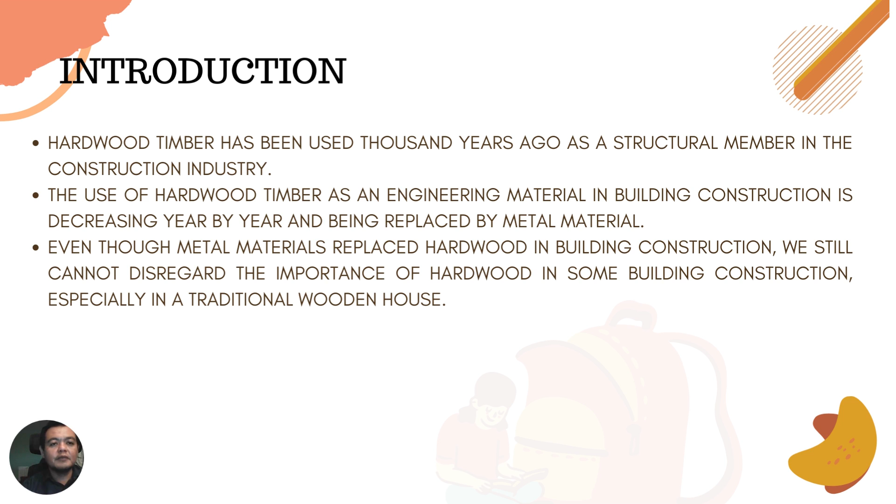For the introduction of this research, as we know, hardwood timber has been used thousands of years ago as a structural member in the construction industry. The use of hardwood timber as an engineering material in building construction is decreasing year by year and being replaced by metal material. Even though metal material replaces hardwood in building construction, we still cannot disregard the importance of hardwood in some building construction, especially in a traditional wooden house.

One of the hardwood timbers that is very popular in Sarawak is Eusideroxylon zwageri, known as Belian hardwood in Malaysia, Ulin in Indonesia, and Borneo ironwood in English. As reported by Soerianegara and Lemmens 1993 and the United States Department of Agriculture 2010, this evergreen tree species is distributed in eastern and southern Sumatra, Bangka, Belitung, Borneo, the Sulu Archipelago and Palawan.

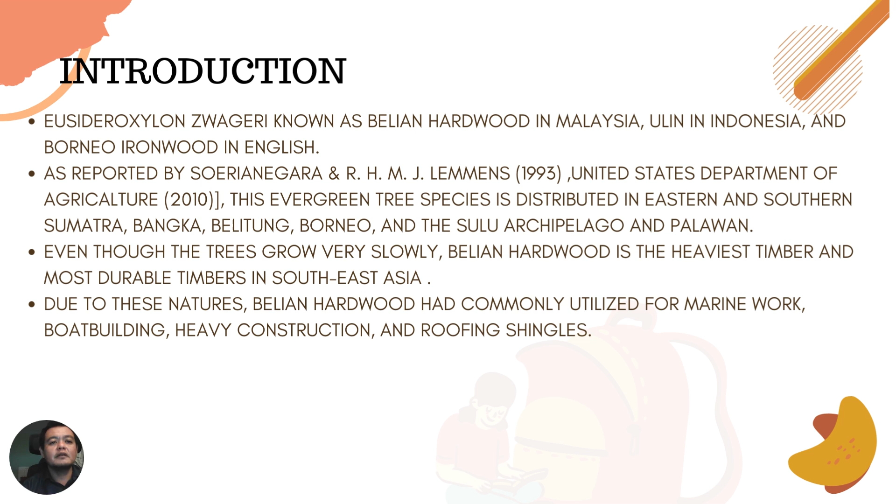Even though this tree grows very slowly, Belian hardwood is the heaviest and most durable timber in Southeast Asia. Due to this nature, Belian hardwood is commonly utilized for marine work, boat building, heavy construction, and roof shingles.

Borneo Talk 2020 states that the people of Sarawak and Sabah use Belian hardwood for building and structures as well as for art pieces like masks or effigies, like the Kenyalang hornbill bird in Sarawak, which is symbolic of the Iban God. These pictures show one example of using Belian hardwood to build the belawing Pereka Tawai,

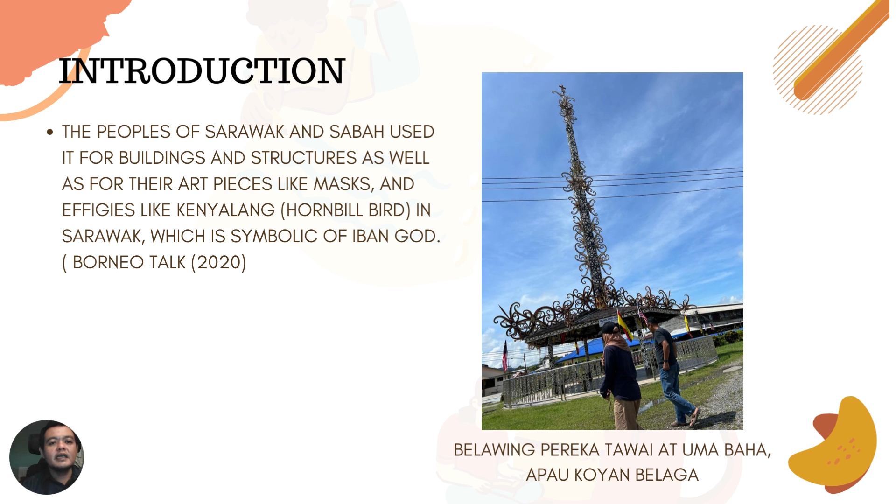or United Heart Pillar, located in Sungai Koyan Asap, Belaga, Sarawak. This 24-meter tower is the tallest belawing tower recorded by the Malaysia Book of Records. It is a landmark that unites the Orang Ulu around this area.

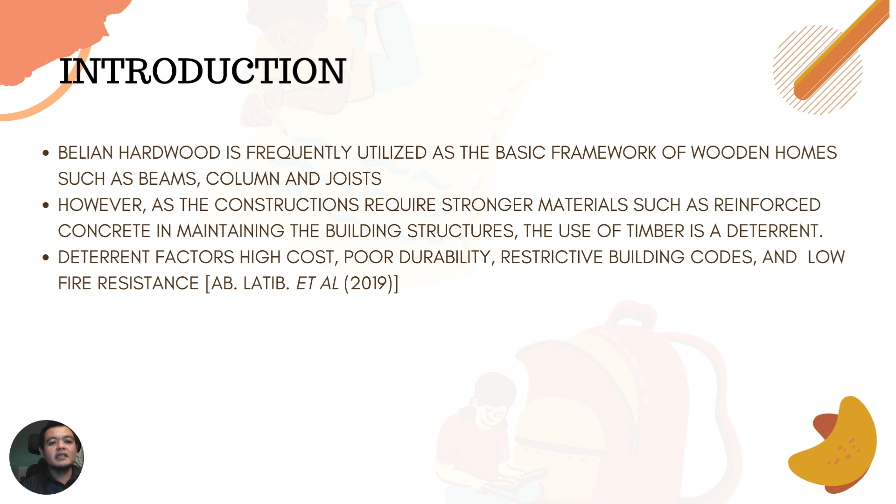Besides that, Belian hardwood is frequently utilized as the basic framework of wooden homes such as beams, columns, and joists. However, as construction requires stronger material such as reinforced concrete in maintaining the building structure, the use of timber is a deterrent. Ab. Latib et al. 2019 state that the deterrent factors for the use of timber products in building construction in Malaysia were high cost, poor durability, restrictive building codes, and low fire resistance.

Record 2004 states that the mechanical properties of wood are its fitness and ability to resist applied or external force. Examples of mechanical properties of wood are stiffness and elasticity, tensile strength, compressive strength, shearing strength, bending strength, toughness, hardness, cleavability, and resilience. In engineering study, the mechanical property that must be determined before the material is decided to be a structural member of the building is the modulus of

elasticity. The modulus of elasticity is very important to identify in order to predict the behavior of material when subjected to a force. The Malaysian Standard Part 2 2001 indicated that the average modulus of elasticity for Belian hardwood is between 12,000 to 18,000 by considering its moisture content much greater than 19%.

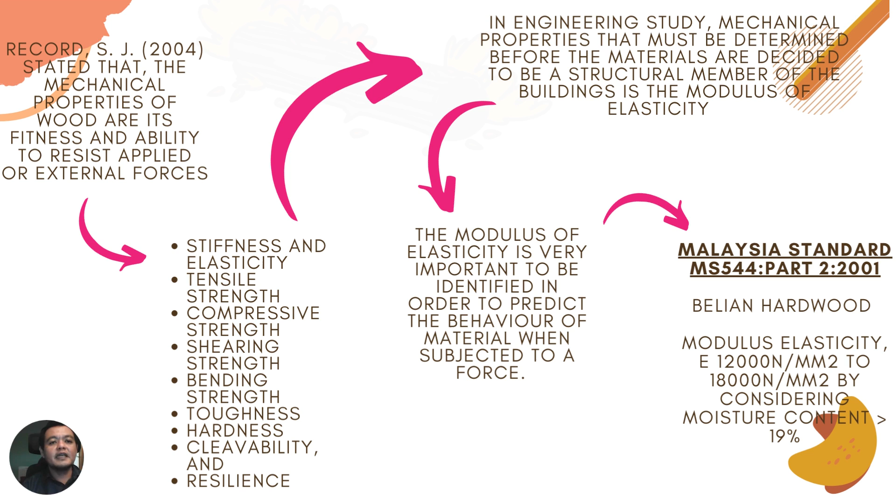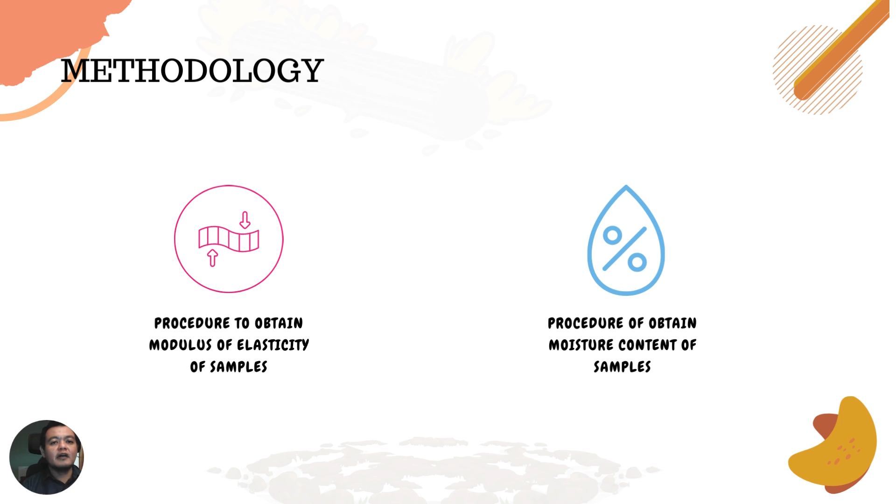Therefore, this study is done to determine the moisture content and to evaluate the elasticity modulus of Belian hardwood by performing an experiment in the structural laboratory. To achieve the objective of this study, two test methods were performed to obtain the modulus of elasticity and moisture content of Belian hardwood. These tests were all carried out at the Structure Laboratory of Polytechnic Kuching, Sarawak.

Usually, there are several methods to obtain Young's modulus. According to Mariko Yamasaki and Yasutoshi Sasaki in 2010, in their research determining Young's modulus of timber on the basis of a strength database and stress wave propagation velocity, the methods of obtaining Young's modulus are: 1. Load method, 2. Frequency analysis or impact method, 3. Ultrasonic method, 4. Stress wave method.

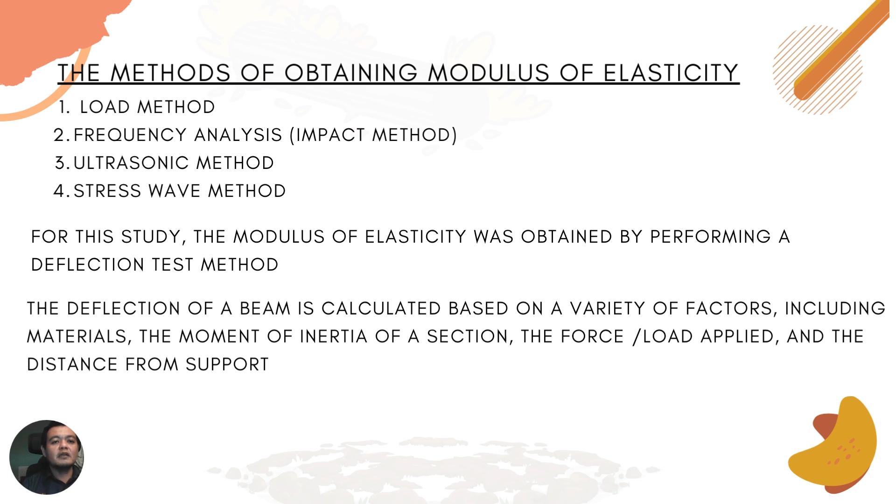Among these, the load method requires specifying the cross-sectional shape of the material, and is a very suitable and simple method that can be used in the structural laboratory. For this study, the modulus of elasticity was obtained by performing a deflection test method. The deflection of a beam is calculated based on a variety of factors including material, the moment of inertia of the section, the force or load applied, and the distance from support.

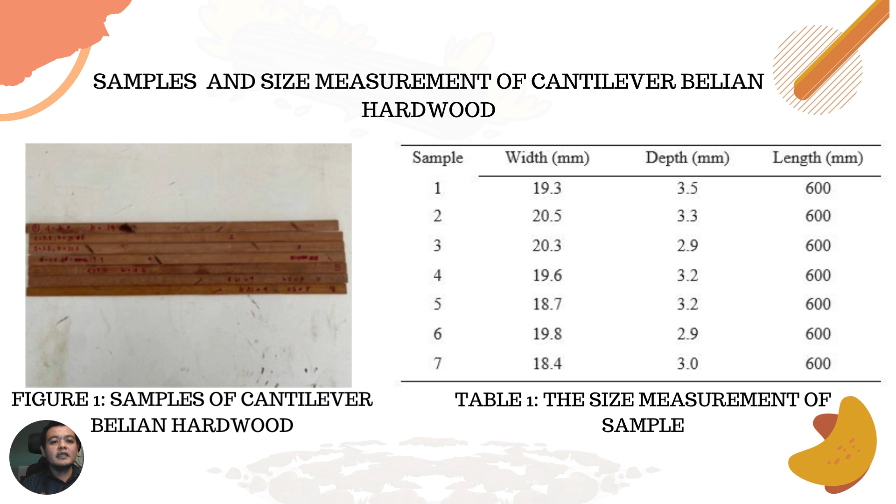Figure 1 and Table 1 show the samples and size measurements used in the deflection of cantilever beam experiment. In this research, 7 samples of Belian hardwood are used that have the same length but different width and depth, as shown in Table 1.

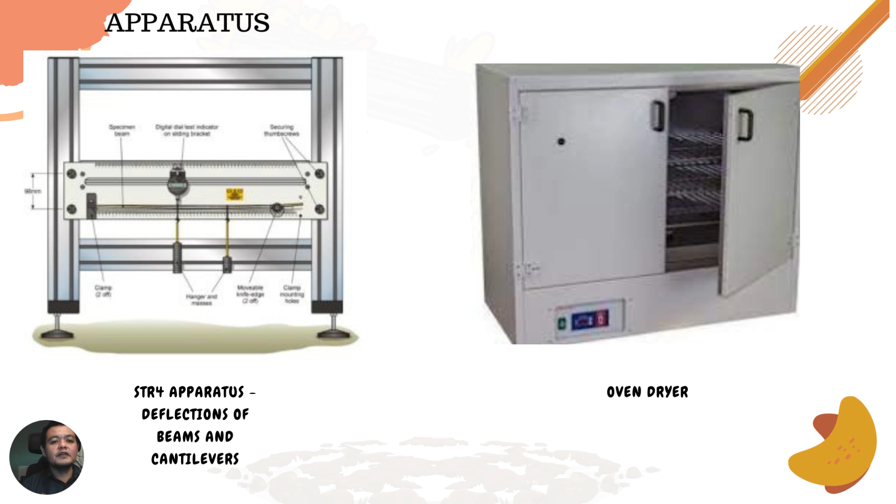To perform this study, the main apparatus used to find the Young's modulus of Belian hardwood is the STR4 apparatus for deflection of beam and cantilever, and an oven dryer is used to find the moisture content of Belian hardwood.

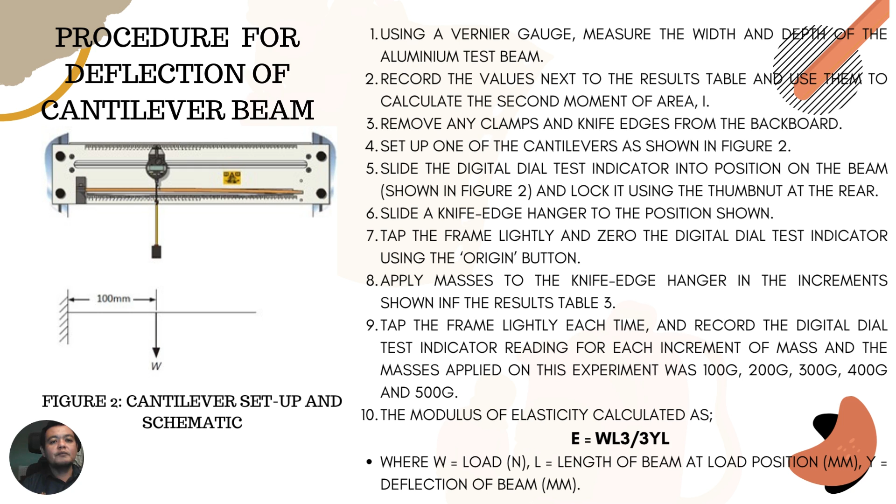The modulus of elasticity is calculated as WL^3 over 3 times Y, where W is load, L is length of beam at load position, and Y is deflection of beam.

As for the moisture content of hardwood specimen, it was obtained by oven drying method. Moisture content was determined from the same piece of hardwood sample with the size of 20 mm x 50 mm and 10 mm thick as shown in Figure 3. So Figure 3 shows the sample of wood specimen that have been oven dried after 24 hours.

To carry out this experiment, the wood sample material must be weighed before being placed in the oven and then placed in the oven at 103 degrees Celsius for exactly 24 hours. The moisture content is calculated in percentage: weight at green condition minus oven dry condition over oven dry condition times 100%.

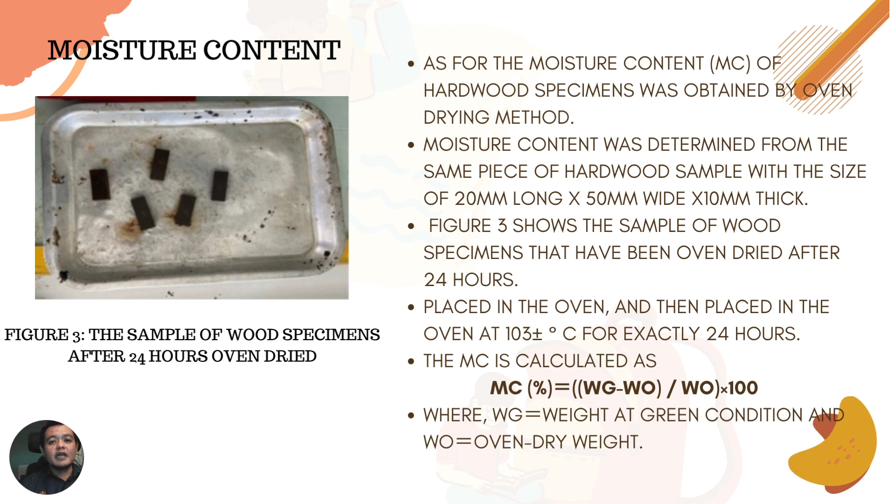For result and discussion, Table 2 and Figure 5 show the result of average value modulus of elasticity for Belian hardwood. The result of elasticity modulus obtained were not significantly different among samples. It was thus obtained that the Young modulus of Belian were achieved with the result range between 12,000 Newton per millimeter square to 18,000 Newton per millimeter square for wet or green condition, where this grade stress of timber is governed by Malaysia Standard Part 2 2001.

Based on Figure 5, the minimum value of Young modulus was 12,568.58 Newton per millimeter square from sample 2, and maximum value of Young modulus was 18,804.74 Newton per millimeter square from sample 4. The result of modulus of elasticity might be different for each sample because the measurement of each sample is not the same.

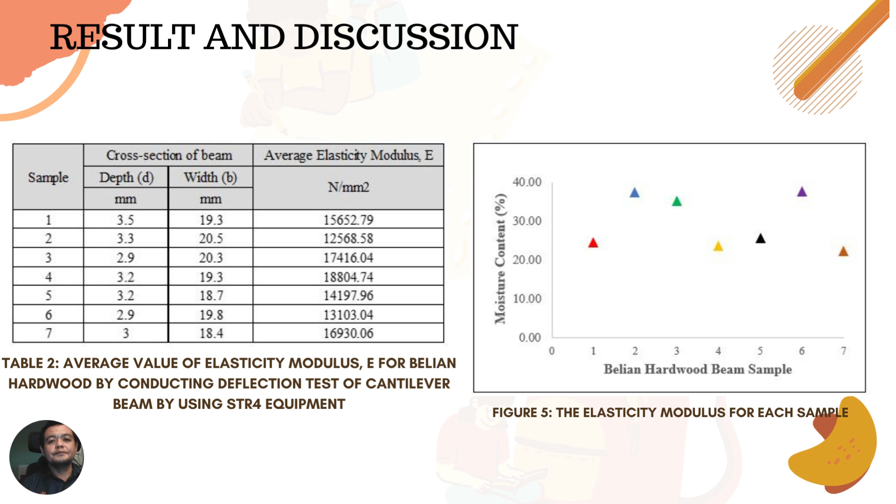Table 3 shows the mean value of moisture content was 29.37% and Young modulus of Belian hardwood is 15,529.57 Newton per millimeter square. Figure 4 shows the moisture content for each sample measured at the wet condition.

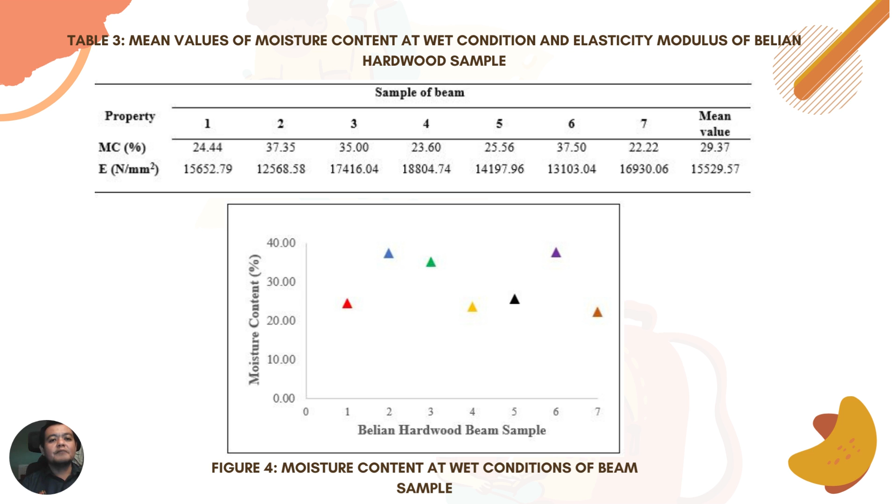For the conclusion, the study aimed to evaluate the mechanical properties of elasticity modulus of local hardwood timber, which is Belian hardwood. The following results were obtained. 1. The result of Young modulus obtained by using the deflection test method were in range 12,000 to 18,000 Newton per millimeter square, where these values are categorized as standard elasticity modulus of Belian hardwood published in Malaysia Standard Code of Practice Part 2 2001.

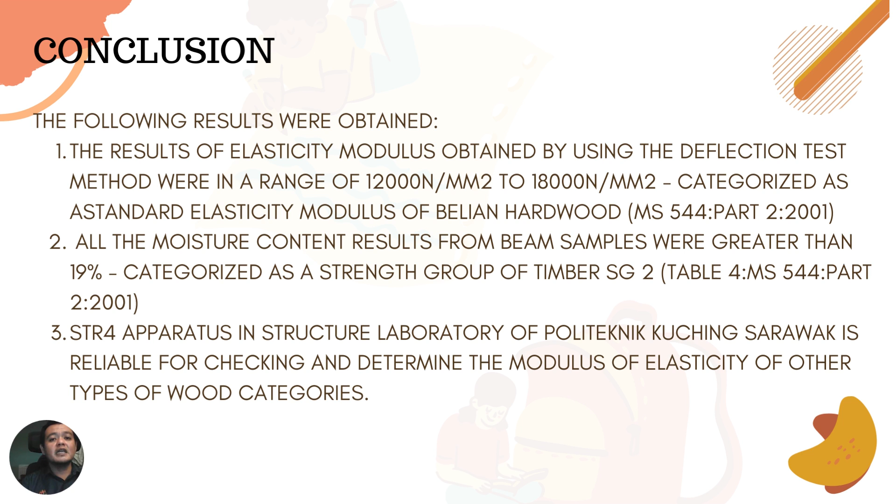Number 2, all the moisture content results from beam sample were greater than 19%. That proves that the sample of Belian hardwood applied in the study is categorized as a strength group of timber indicated in Code of Practice Malaysia Standard Part 2 2001. Meanwhile, the STR4 apparatus in Structure Laboratory in Polytechnic Kuching Sarawak is reliable for checking and determining the modulus of elasticity of other types of wood categories.

For the recommendation, number 1, for further study, it is really recommended to conduct the experiment of deflection test with various samples of beam material by using STR4 apparatus. By using a deflection method to determine the Young modulus of material, some expensive apparatus are not necessary, and moreover, the tests are relatively simple.

Number 2, furthermore, the deflection test also can be carried out with simply supported beam by following the procedure given in STR4 laboratory manual sheet. By conducting such experiment, more results and findings can be elaborated.

So number 3, in the course DCC40172 Structure, Hydraulic and Wastewater Laboratory, there is an experiment of deflection of cantilever and simply supported beam. So through this experiment, students were able to conduct a test of beam deflection to determine the deflection of beam. Therefore, by conducting this same experiment, students not only can obtain the deflection result, but also they are able to obtain the value of Young modulus.